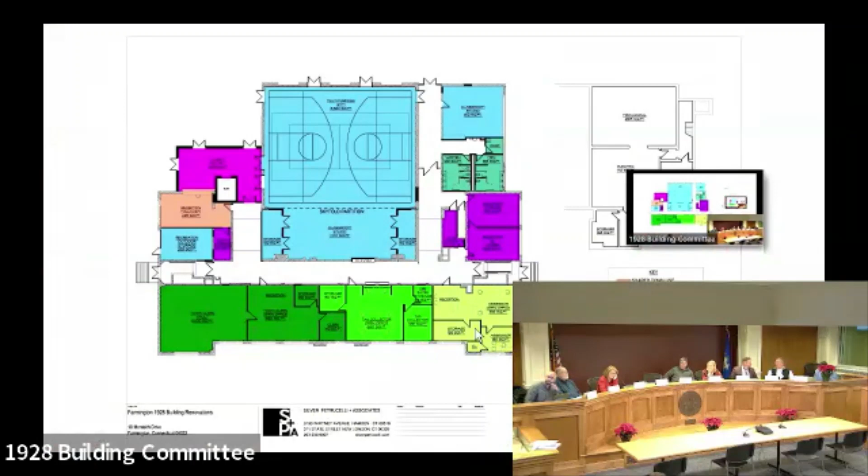Since our previous meeting, we've done some slight refinement to the floor plans. We were all in a good place last time we met. Russ had recommended we look at maintaining the area of the building that's currently above the basement, after we discovered that that basement was part of the original 1928 building, and that was a great recommendation. In review of the structural systems used to construct that piece, as well as the waterproofing and exterior envelope around that area, we feel it would be very beneficial to maintain that area of the building.

It will minimize the amount of reconstructive efforts needed if we were to peel this one-story piece off that's located above the existing basement. You gain some additional programmatic square footage, which we are showing as an additional recreation classroom here in the blue, up in the corner. And we've also relocated the toilet rooms.

If you recall, previously we were showing the toilet rooms stacked below the toilet rooms on the floors above, but given the reintroduction of this space, we need to maintain what is the existing corridor running through the 1928 building. So we've repurposed or relocated the toilet rooms to this location in the plan, which puts them above the basement - very easy to provide those renovations as we have access from below.

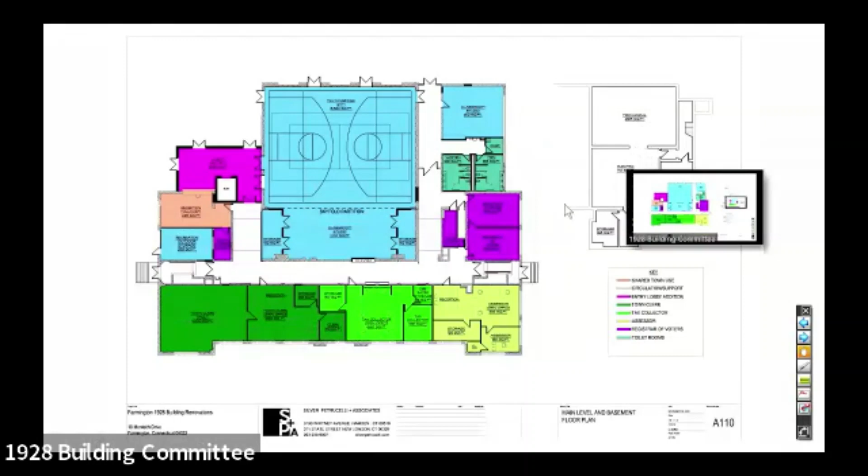On the right-hand side is the basement plan, which we've now confirmed those dimensions, and we would intend to maintain this area for your utilities and services - primary electrical, primary gas, fire protection, and mechanical services coming into the building. The upper levels have not changed since our previous meeting, so I won't go into fine detail, but if you have any questions, please speak up. I would be happy to answer.

Last week, or two weeks ago, we met with the town hall leaders as well as the project architects and civil engineers for the high school project. The purpose of that meeting was to come together to discuss the overall site plan as we're blending these two projects. We really want one campus plan that works for both functions, the high school and the 1928 building.

Following that meeting, we've made the revisions you're seeing here, which include providing more green space between the 28 building and the high school parking. So we're proposing removing one row of parking on the east side of the 28 building. We've also eliminated the loop drive that circled the 28 building and instead given it one way in, one way out, with vehicle access off the main road that comes off Monteith.

Monteith would be to the bottom right of the page. If you're coming to the 28 building, you would take the first left when you reach the top of the hill, and that main drive would take you past all of the high school functions and bus loops, directly to the 28 parking on the left-hand side of our facility. Exiting would be the same path, so there's no cross mingling of traffic between the two functions.

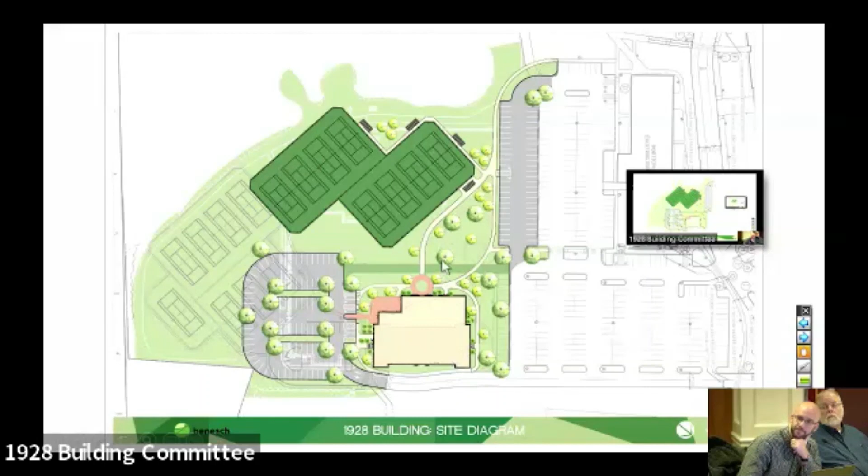We're also beginning to look three-dimensionally at the 28 building and the surrounding site. These are all in development, but we wanted to show you our progress. Our goal is to develop the referendum material you'll need to portray what this building will look like to the townspeople when they come out for that referendum, and also for your town coffee meetings and updates to give them the most recent progress on this project.

We're looking at what that addition may be—the one-story entry vestibule to the 28 building, and then the elevator tower. This first one depicts how we had laid it out in plan. We were looking programmatically up to this point, knowing where the elevator wants to come into the building and where the vestibule wants to be, but hadn't really started developing the architecture and how we tie new to old. But we wanted to give you a sense of what that would appear to look like.

But then we took it a step further and asked, can we respect the 28 building a little more by potentially pulling that elevator shaft off of it, so it's not directly attached? Instead there's perhaps a glass connector that connects the elevator shaft to lead you into that facility. In this rendering, the elevator would be located here, not actually attached to the building, but we extend that corridor out to grab it. We're going to continue developing these in both 3D perspective and plan to show a few solutions for how we can achieve this to work programmatically and with the existing and new architecture.

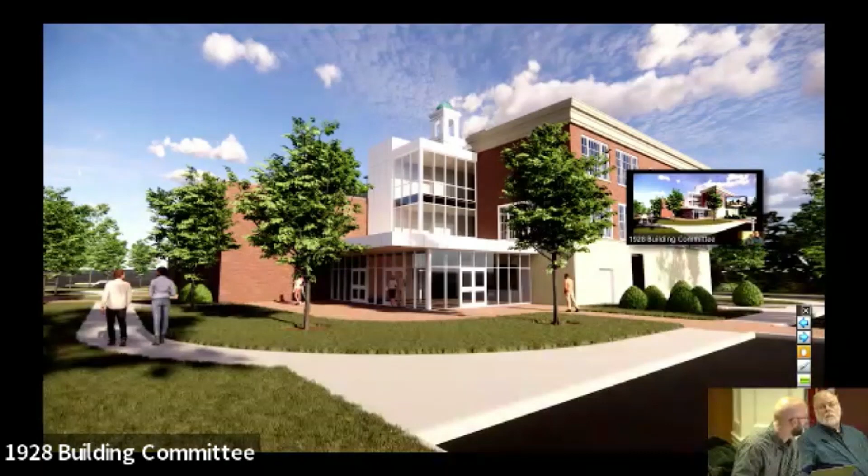Is the yellowish tan color around the bottom of the building there now? Did you go back to the front? The whole thing, yeah, first floor, totally missed it. It's the limestone - there was originally a limestone base, and they finished it with a parge. It's stucco with a parge.

I can't believe how many times I've driven it. Did you lower it down a little bit? Lower the grade down, or is it just a window change?

It's intended to be pretty close to what it is. Maybe the rendering depicts it a little differently from this angle. But no, we're not adjusting the grades much at all. Our intent is to work with the existing grades.

We have an elevated exit on the east and west ends of the building where the stairs come out. Our ADA entrance and exit would be this new vestibule, as well as, you know, grades pick back up towards the rear of the building where the current entrance to the high school is off the driving loop.

What's behind - the smoke chimney? About that lane, that separated lane from the buses and high school traffic - is that a lane that we're creating for the 1928 building?

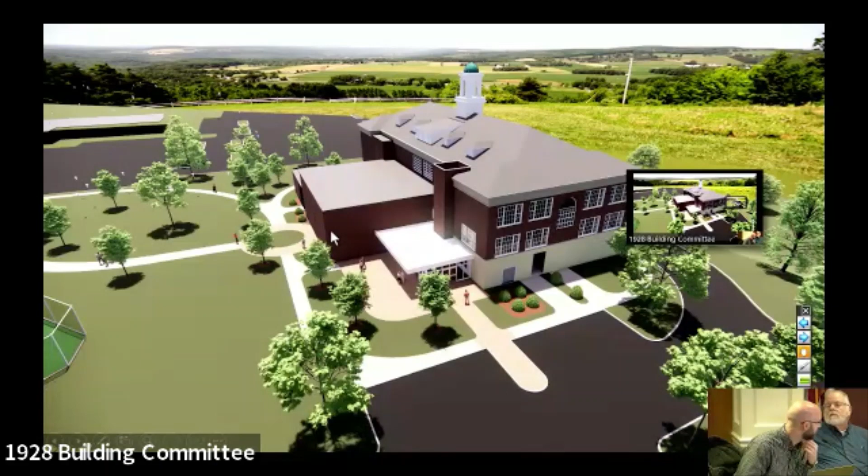No, if you were to take a left at the top of the hill currently and go down to the high school entrance at that end, at the west side of the building, it's that same drive that currently exists. But it'll be separated out - separated by landscaped islands between the high school parking lot and that drive.

I'm not familiar with what the new high school traffic looks like - they're coming up to the right, I believe. So this will be an opportunity to go to the left when school traffic's going straight. There's multiple ways to go in.

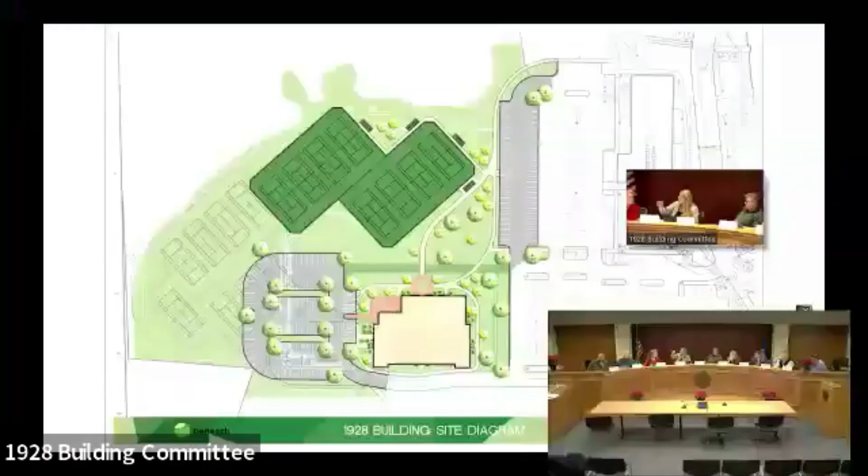You go up Monteith and to the right is a bus drop off and a parent drop off loop. Then students would kind of go to the left a little bit to get to that parking lot that is depicted there. And then faculty and staff go to the back because there's a road between the new building and the 900 wing, so they loop around the back. So there's a couple routes right there.

So is there both traffic? Excuse me, now I'm gonna start coughing.

That lane that we're talking about, going down to the 1928 building - will students and people going to the 1928 be on that lane at the same time? Correct, they will. To start down the route and then they'll veer off to the right to the student parking lot. Yeah, let's get some clarity on this - I didn't think that was the case. If you can explain that, they're coming up.

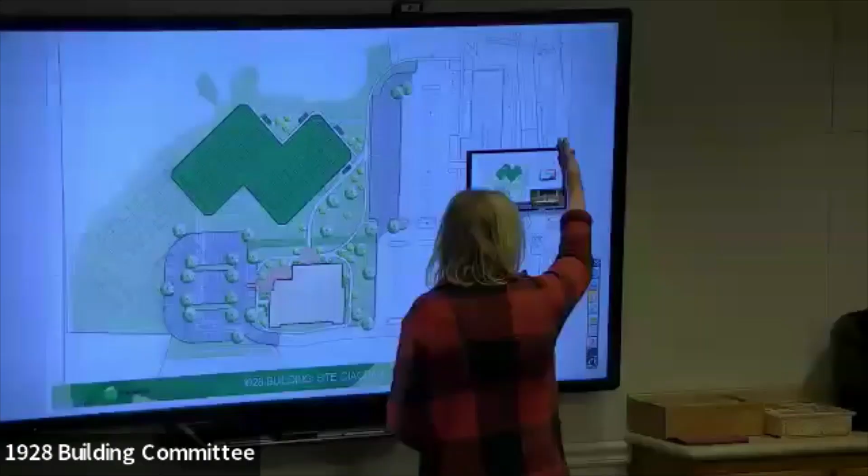Now you take, as you go to the auditorium, you go on that road. Did any students go on that road? I thought students went this way. Students would go to the parking lot that's right there - that's where student parking is.

So they come this way to go into the parking lot? Correct. But also school starts a lot earlier than town hall functions would be starting. So they do come up and then the buses go this way, but the kids can come down this way and go into the parking lot this way.

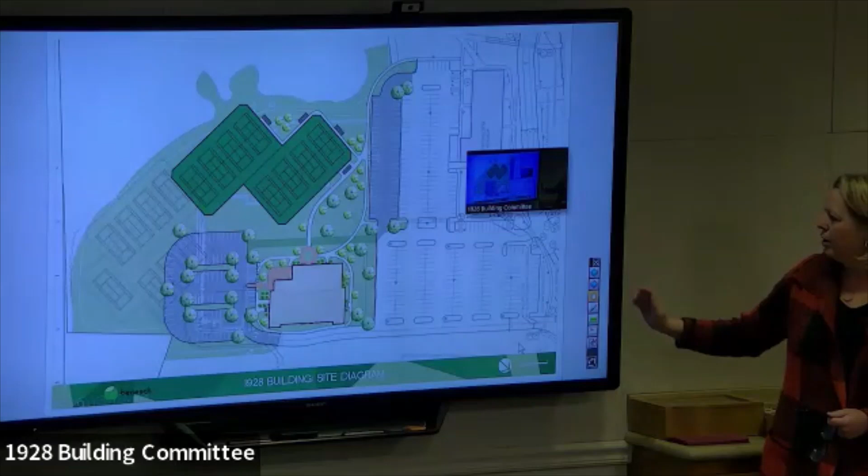The buses will veer to the right at the top of Monteith, because they're even further to the right, like on the wall, by where the tents are. There's a bus loop - it goes like this - a bus loop and a parent loop that kind of goes this way. And then if you're a student, you'll veer to the left to park in those parking lots that are on our screen.

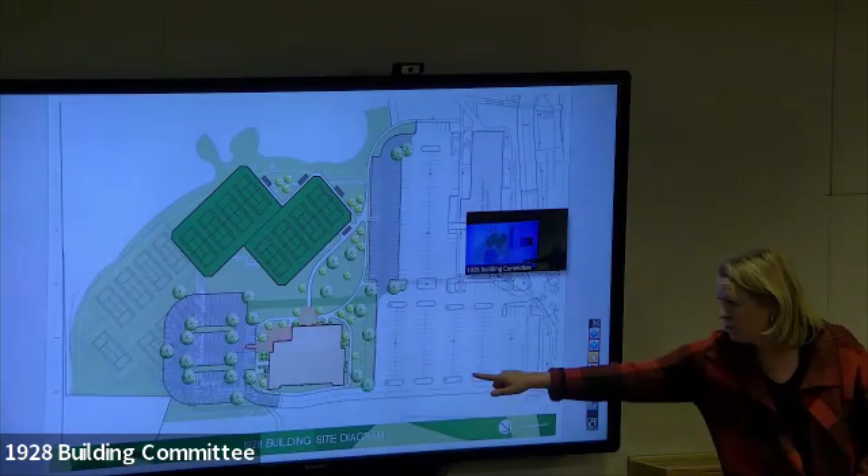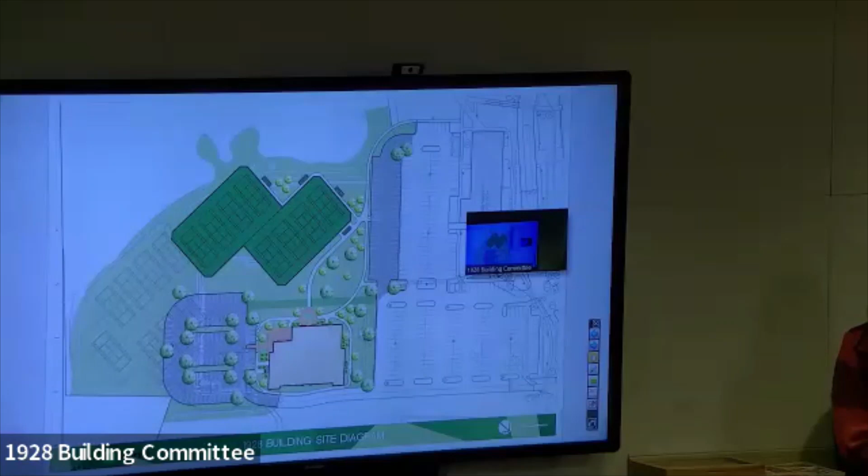So in theory, the students can come down this road and into the parking lot. That's where I got confused, because I thought there was going to be some buffer between the parking and the road. Originally, there was parking where Chris's mouse is, and we thought that was very close for students parking towards Route 28. So they eliminated that and made it more green space, so there's more of a buffer between student parking and 28. And up by the tennis courts, that parking was reallocated, where the lanes off the road start to go.

These are going to be buffers, but it can still come down and go in. What I misunderstood was I couldn't figure out how the kids were getting in there, because I thought you meant that was a continuous buffer of those little rectangles. No, that's between the road and the lanes.

Just real quick, on the outside there, the tennis courts and the parking that you shifted up - what's happening to the hill? Is it still there, or will we have to go into it? I assume the tennis courts aren't part of our project. And the parking's not part of ours either. I was just curious because there's a hill.

There are still regrading efforts at that end. I don't believe it's as severe as when the ball field was planned to be there, but there will still be regrading necessary. There might be some for the courts - low walls around the courts or something. I believe previously they had done it all through grading; it was a pretty aggressive slope up that hill, but I don't think there were any retaining walls.

So I don't anticipate it based on this design. Okay, Chris, for future meetings, can you expand that site plan to give a little more clarity and visuals for the committee and people who want to see this information, where all these lanes go? Yes, absolutely, I appreciate it. I've seen it for the new high school, but that confused me.

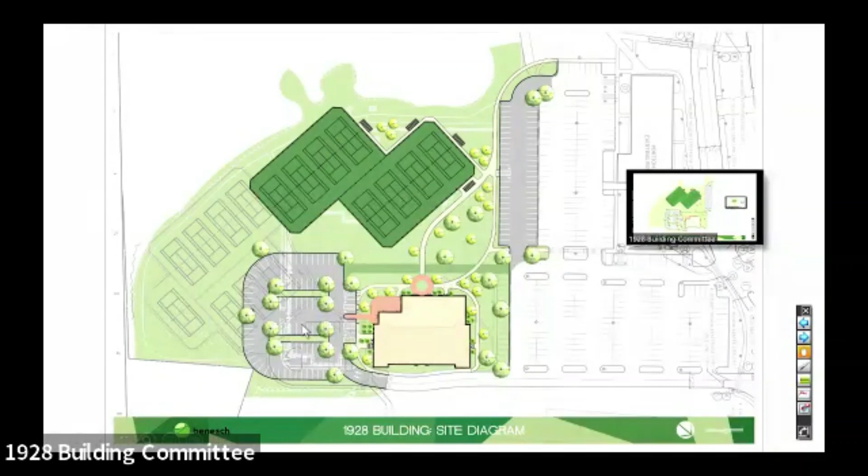Go ahead, Chris. Thank you. Good.

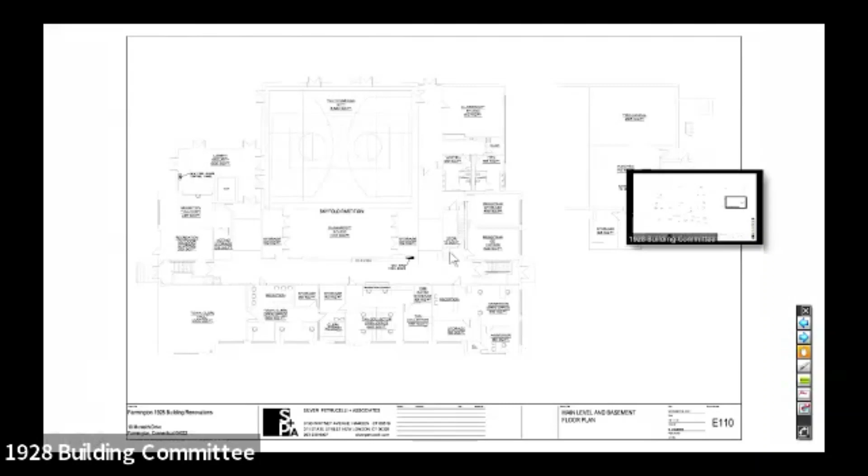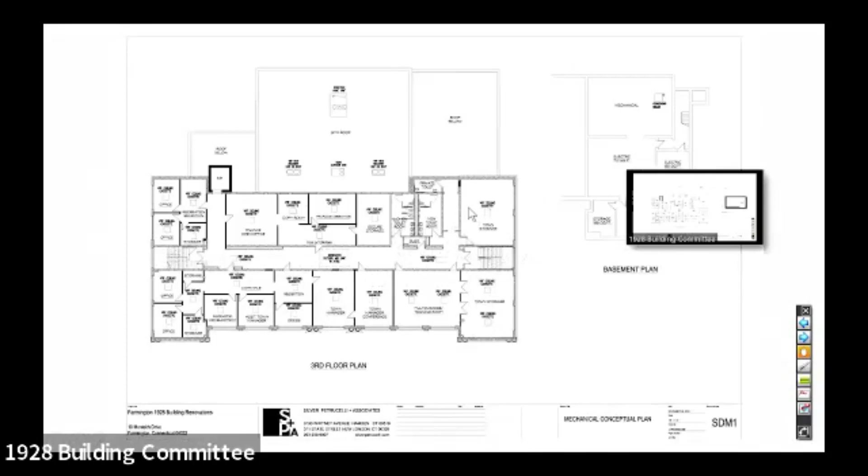We've also turned our engineers loose based on the designs we've been working through over the past few months, and they've started to develop narratives and recommendations for the proposed systems. In terms of mechanical, I'll jump ahead to the mechanical plan. I know it's tough to see, but the short version is we're recommending a VRF, or variable refrigerant flow, system. There are a few benefits to a system of this nature - it allows you to provide heating and cooling through different areas of the building simultaneously, so we're really trying to optimize the ability to manage temperature control throughout all spaces while maintaining highly energy efficient equipment.

So we're eliminating the steam, oil, and gas-oil dual fired boilers down in the basement, and going with rooftop equipment located over the gym space as well as within the attic space. We're trying to reutilize existing systems where we can, meaning ductwork that is running through chases within the building. Rather than tearing out existing walls and replacing the ductwork, we're analyzing what we can reuse, so we're just replacing the equipment at either end but reusing that infrastructure of the building.

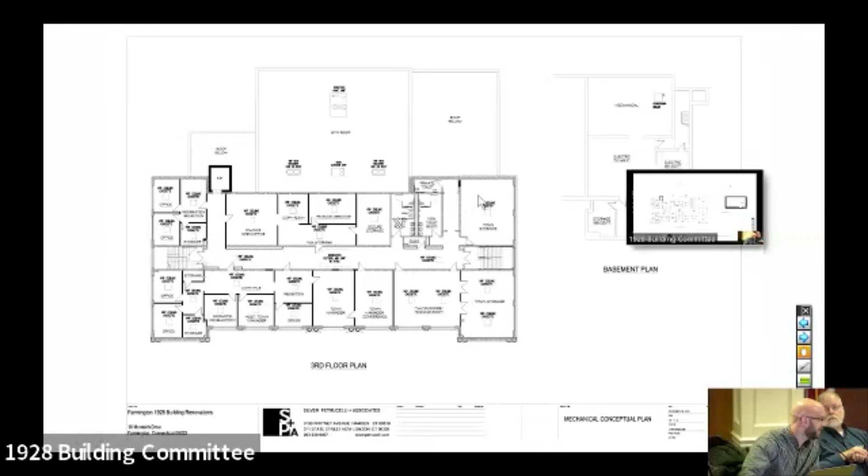We are suggesting to maintain a small condensing boiler in the basement with the perimeter radiation around the building that exists now, refinished of course, which would provide additional heat capacity during the really, really cold spells of the winter.

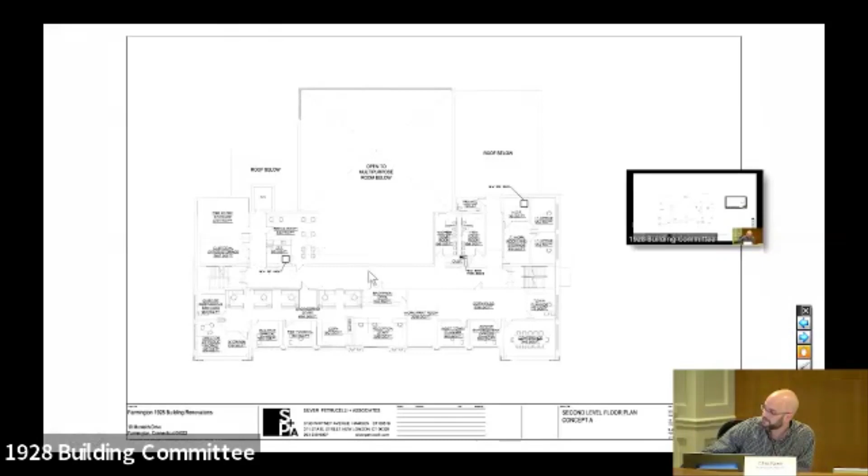In terms of electrical, we're still maintaining a primary service coming into the basement area where it exists currently, and trying to maintain your panels in locations relatively close to where they are now, but all new infrastructure with all new LED energy efficient lighting throughout. We have the MDF room, your main server room, as well as a secondary IDF room on the second floor. We worked through all of this with your IT department as well as Russ, and believe it's a simple yet highly efficient system.

We were asked to start to look at the potential for solar panels. So we've just graphically shown potentially where these could be placed. We certainly need to orient them to the southern exposure as much as we can. This is just to give you a sense, if solar panels were to be considered, they would likely be on that front elevation or the south side elevation of the roof, as well as the flat roof over that gymnasium space. So on the actual hip roof.

In order for the loads required, this is a rough beginning of how many panels might be needed. So we believe we would need to populate both that hip roof of the 28 building on the south side, as well as a majority of the flat roof above what is the band room currently.

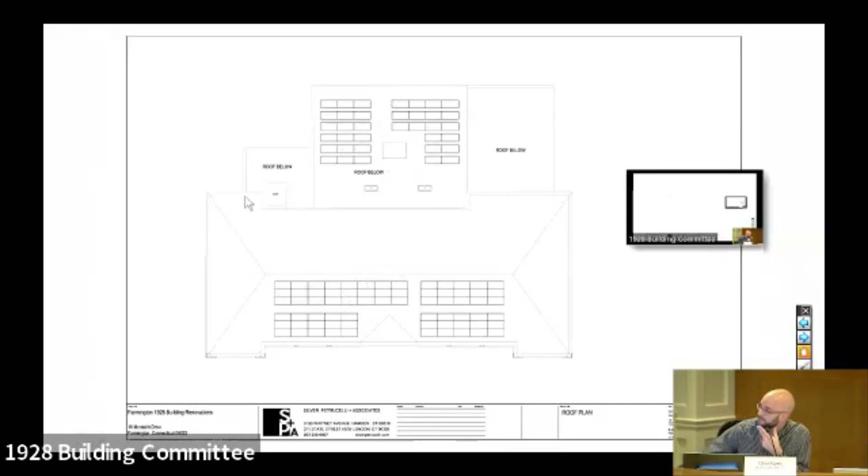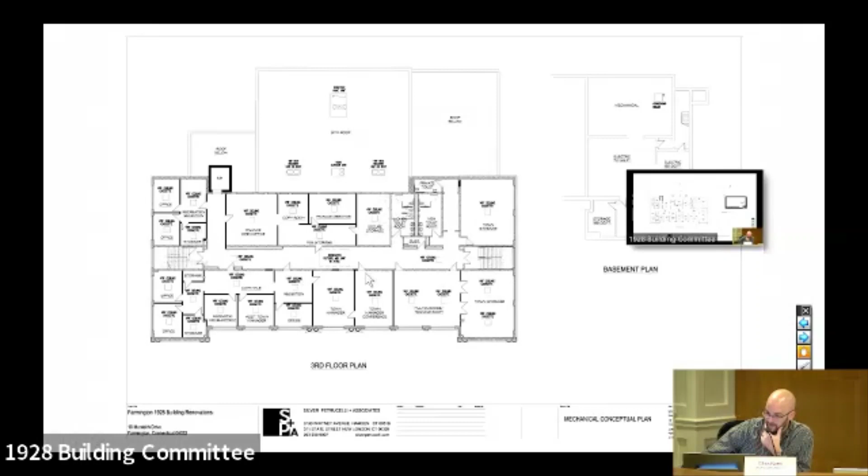We have narratives developed for all these systems that we'd like to distribute, if they haven't already been, after this meeting, to the committee members, and certainly answer any questions via email tonight or as follow-up at our next meeting. But that's essentially where we are as of today.

Thank you, Chris. Any members have any questions for Chris and Dave? A couple. Go ahead, Jack.

I think it looks good. I wonder, is there anything in - I'm just brainstorming here - the gym just looks like a box. Is there anything in the budget to do anything with those walls, get some high windows or something, to make it look less like a box?

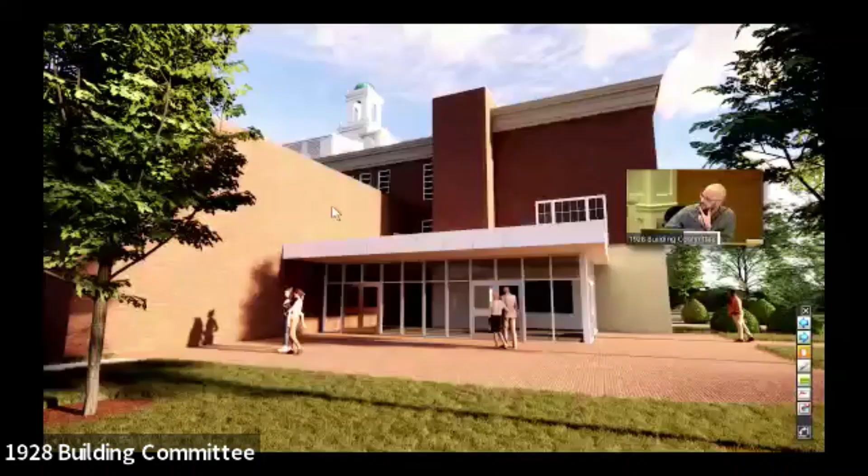Yes, I'm glad you mentioned that because I forgot to mention it. Originally, it's a great looking box - originally there were high windows in what was that 1928 auditorium/gym space, and we would want to restore those. We have not added them into the rendering yet, but they're coming. We believe high windows likely wrap the three sides of that two-story space, and it might be just like some sort of cornice or something to relate it to the existing building.

Could you next meeting just bring some plans that we could scale? I was going to ask about the distance on the east side of the 1928 building to the parking lot. I don't know if you can scale it on this or not. That question too.

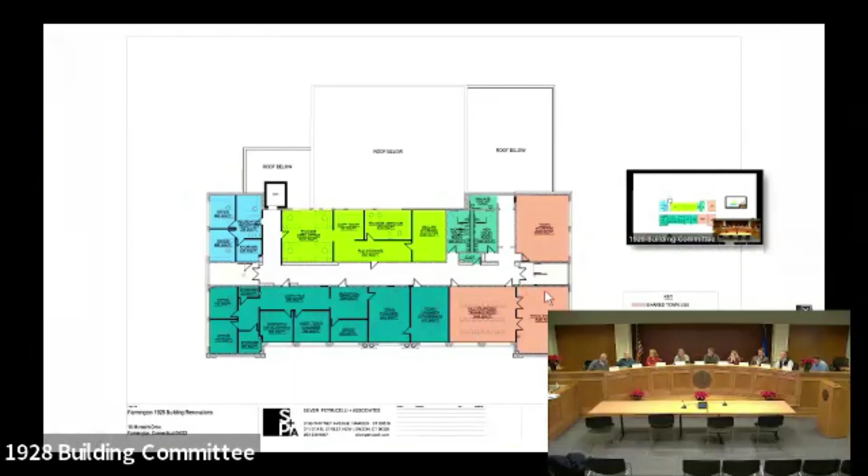It looks good, I just was wondering what it is. I believe it was about 130 feet in width to the parking lot, to the other side of the building. And then another - from the east side to the parking lot, just the green space - yes, that would be a clearer way to ask.

Just to give you a sense of scale - oh, the other parking lot. So, I'd say you're roughly about 50 feet from the face of the building to the curb.

Yeah, that seems good, and I think it still makes sense. When we first didn't have the loop, I was wondering if it made sense to move the entry, but I think it still makes sense where it is for the building. You drive around the building to get to the entry, which I think is okay.

I think probably the elevations, when you start really looking at the elevations to scale and proportions of them, that would be good. I like where you guys are going.

Gene, you have something? Yeah, I like your idea about this, because I'm curious also about the tennis courts and the green space between that new parking, and I'm just curious what that would be in the future. You don't have to - and I'm assuming signage will be partially our responsibility as well for getting into the 1928.

And what are the hours? 8:30 to 4:30. I'm sure between this committee and the FHS building committee, signage will be worked out. It's just gonna be pretty much in thorough detail.

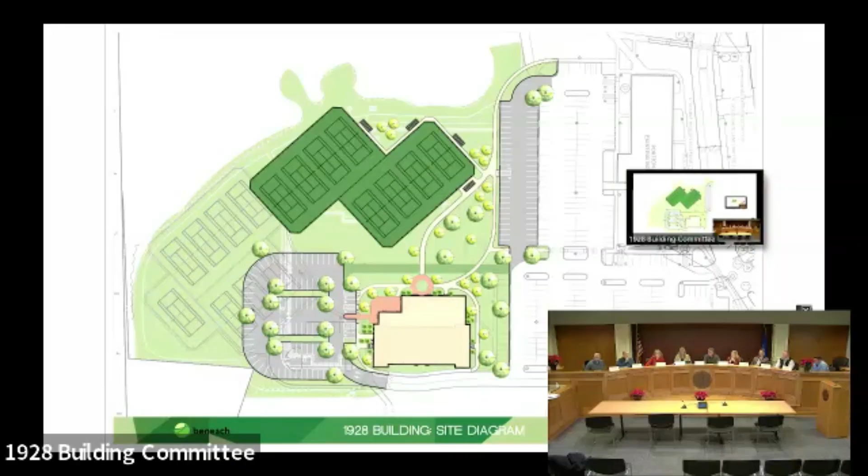Sure is. And we tried to definitely have it without the back loop so that the town hall business is kept separate, the kids aren't coming down that way. They'd be in the parking lot, but no one's really going in front of the new town hall, and they'd park in the back unless they're doing town business. And when we met with Scott and the architects, they went through all this stuff.

I think it's good communication about what Scott needs for the school and the building committee. These guys have been working, they pushed the tennis courts up, and they've been coordinating between the two groups. I appreciate that effort and that time.

Okay, any other questions? Russ? Yeah, can you go back to the rendering that shows the front of the high school?

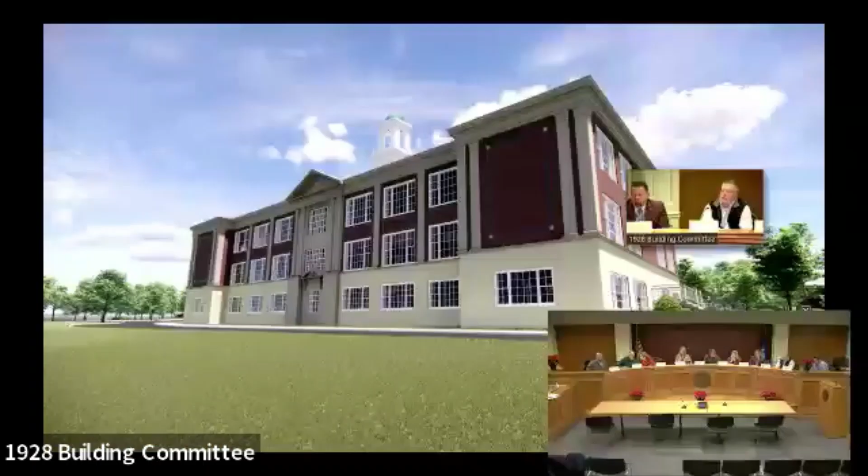So right there, those windows are pretty much at grade, the bottom of the window. One thing I think we need to adjust, when we go out, so it really represents what we have. So do you mean the bottom windows are closer to the ground? Correct, touching the ground.

Yeah, and I think that the center window where there must have been a door years ago—originally that was the door, a soft door, right? I think that window is like gone. No, it's there, but some of it's under some dirt, or it's real close.

So I think as part of this project, I would prefer that we do some grading to make an adjustment to get some more space, as you depict here. I think it's fine, but we need to depict what we actually have.

I think we need to drop that down a little bit, just so we get some more grade away from the window, so we don't have any issues when we get our big snows.

Dan, Chris, anything? Mike? Peter, maybe just to Chris, but generally the group—maybe if we could walk through Chris finalizing his plans and the timeline, because I get questions about it. Just to refresh my recollection in terms of getting this to referendum, when we expect Chris to finalize his plans. It's more of a timeline question.